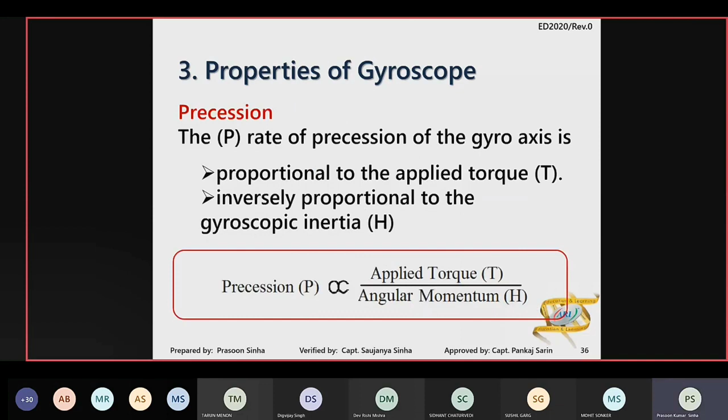Behavior of free gyroscope on rotating Earth. Just take a look at the slides and see if it is understandable. It is based on the concept we just talked about. If you have any doubt, please do ask me.

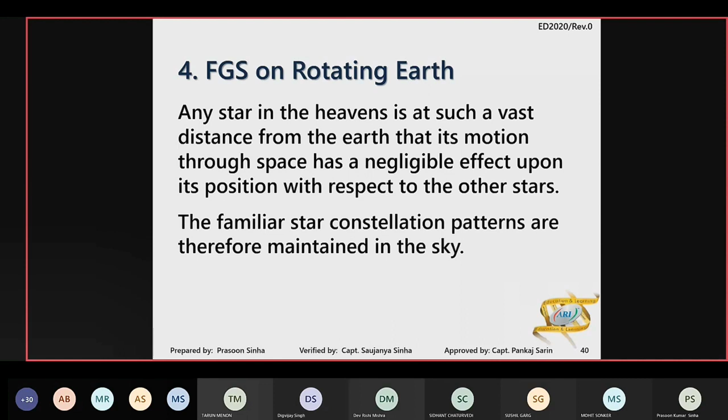Next. Next. Next. Here, one thing I would like to say. This concept of tilting and drifting is of prime importance.

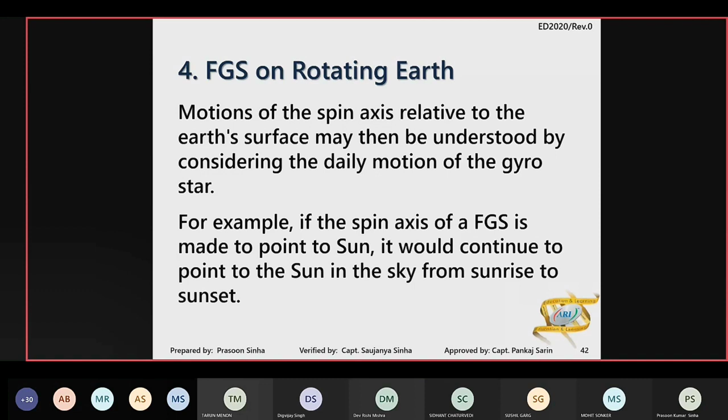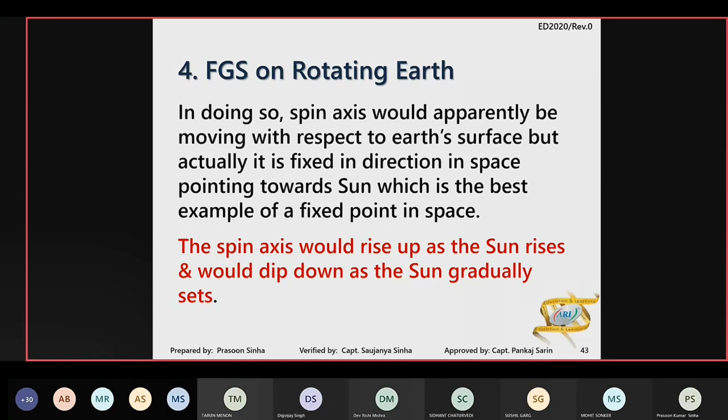But this concept is necessary to understand. Next. Now, as we have seen, all the stars move in a circular path in the sky.

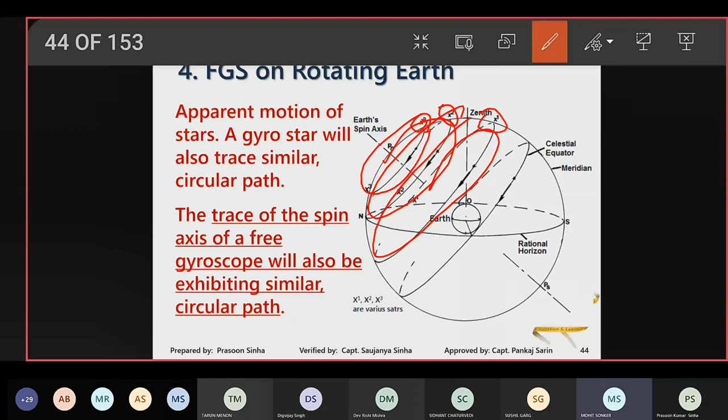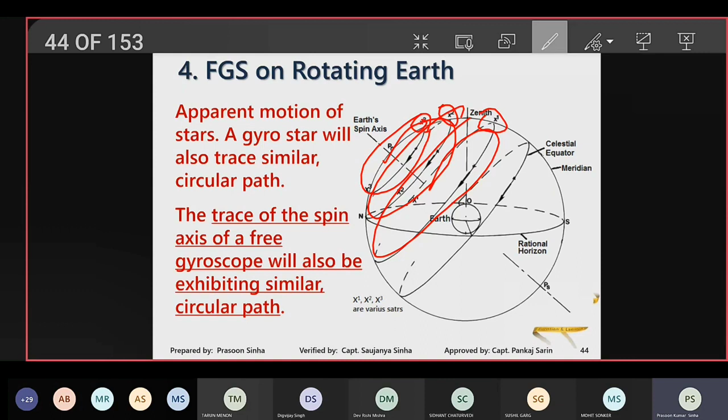What kind of shape will it have? Circles. Again, circle. Very good. So the spin axis of the free gyroscope traces a circular path in the celestial hemisphere.

Talking about tilting and drifting. Now that we have understood that a free gyroscope which has got a property of rigidity in space will remain fixed in space, but with respect to Earth there will be an apparent motion. And statically, what is the condition of the spin axis? It can be described by tilt angle and drift angle.

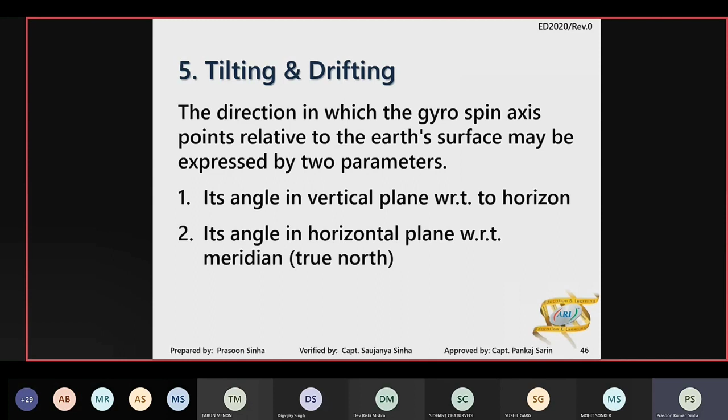Tilt angle, the angle that the spin axis makes with the horizontal. So that's an angle in the vertical plane. How high above the ground? Altitude of the star and tilt angle of the spin axis, same thing. The other one we have already talked about, the angle in the horizontal plane, which is with respect to the meridian. Tilt and drift.

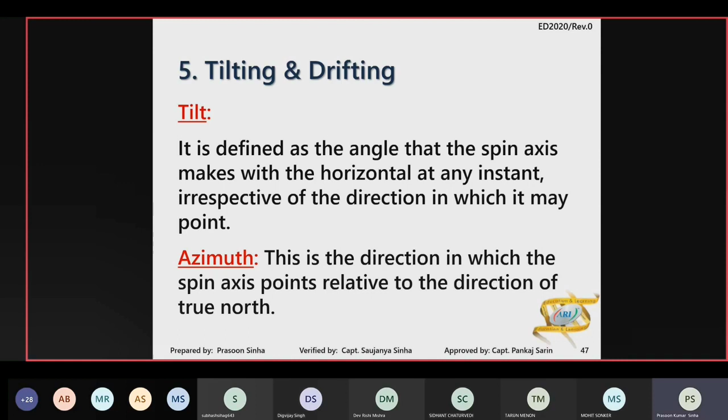Then why can't we measure the spin axis of a rotor with respect to true north? मैं फिर से बना देता हूं इसको ड्राइंग को, so that there is no confusion. This is true north. The spin axis of the rotor, this is the rotor, and the spin axis is pointing in this direction. So can we measure this angle or not?

Yes, sir. This, what you have just measured, this angle is the drift angle or azimuth angle, this one. Angle between the spin axis and the meridian, or angle that it makes with respect to true north. Is it okay?